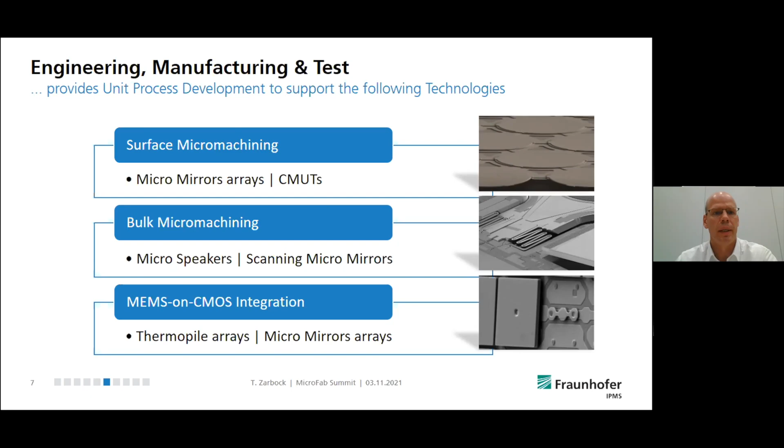And two examples, let's say from the customer side, or at least in this case, it's more on the development side. One example I can show here is what we consider one of the next big things in micro-optoelectromechanical systems. So it's supposed to be a phase modulating micromirror array for real holographic displays. This is currently an EU Horizon 2020 project that has been started last year, beginning of this year, and is supposed to be running until end of '24.

It's comprising also a consortium of different partners, 8 partners from 6 countries in the EU, and it's currently starting at TRL 3. It's supposed to go the way to TRL 5, and the status is that design phase has started, as you can see at the bottom, and the initial chip manufacturing has started in my clean room, and the application that it's supposed to be targeting in that project is a pilot and a showcase for a head-up display in automotive, so in the windshield of a car.

The good thing is it's what we call real holography, which is eye fatigue proof and real genuine image quality in real time. So not what we are used to from television at home, but it's the next level. Another project that is already at TRL 7, it's also with automotive. In this case, it's a solid state LiDAR system for autonomous driving. The customer that we have here, and we can also mention, is the company AEye from the United States.

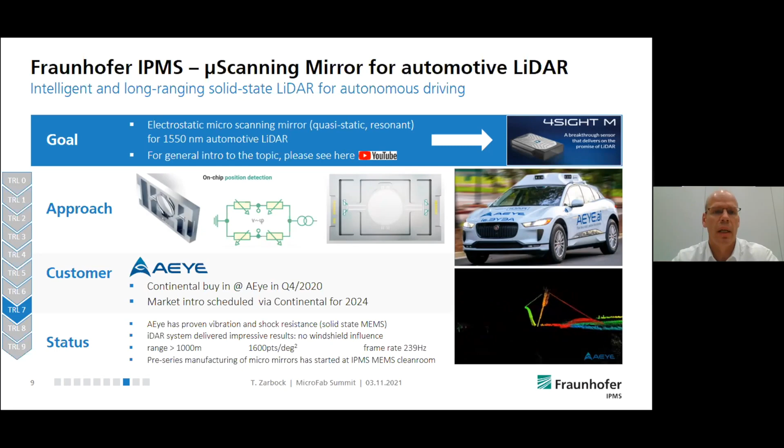Continental has been buying into that startup company Q4 last year, and the market introduction of this system in our device is supposed to be in 2024. As you can see at the bottom, there are quite some impressive features that have been achieved already. So the range of the system is going up to 1,000 meters. It has a high frame rate, and pre-series manufacturing of the micromirrors has started in my clean room as well. And as I said, this is already at some high TRL level and supposed to be going productive in 2.5 years from now. That is some overview from my side.

And here I would hand over to Mr. Schieferdecker, the CEO of Heimann Sensor in Dresden, one of our long-term and most important customers that we have from the industry side. And he is giving some insight into the thermopile application. Great, thank you very much, Thomas, and Mr. Schieferdecker, again, welcome. And if you could launch your slides now.

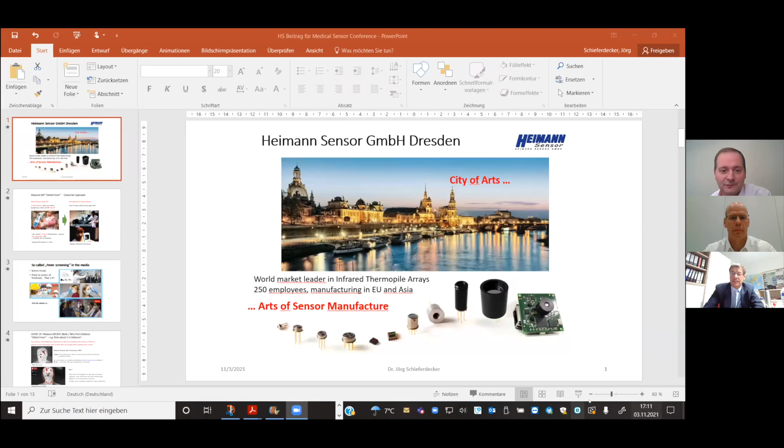Okay, I just tried to release them, so I hope it is released. Yeah, I think they're coming up. Here we go. Beautiful. That's great. Okay. Excellent. And then, yeah, so to stay on time, let's aim for 6 or 7 minutes, and we have a couple of minutes for Q&A. Okay, I try my very best.

My name is Jörg Schieferdecker. I am the CEO of Heimann Sensor. This is a mid-size company with the headquarters in Dresden, Germany. We are a world market leader in infrared thermopile arrays, have over 250 employees and manufacturing sites in Europe and Asia. And we have a bunch of different sensor products for single detector and array detectors for infrared imaging.

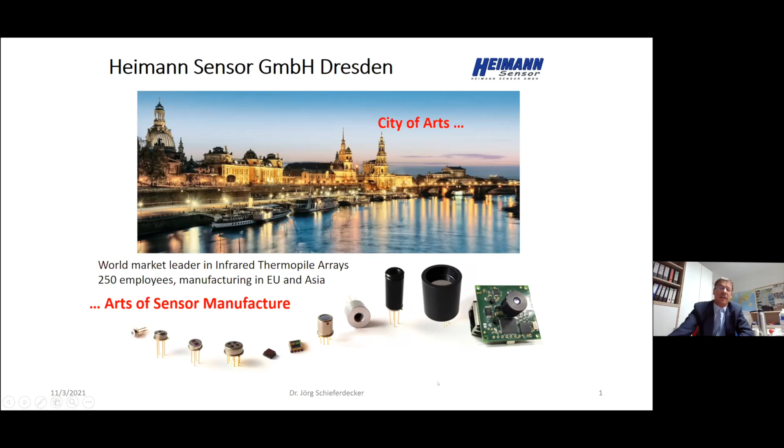Now I want to concentrate on the medical application rather than the technology. One of the main applications, especially in the last year and this year, was to measure the elevated body temperature to detect fever as a consumer application.

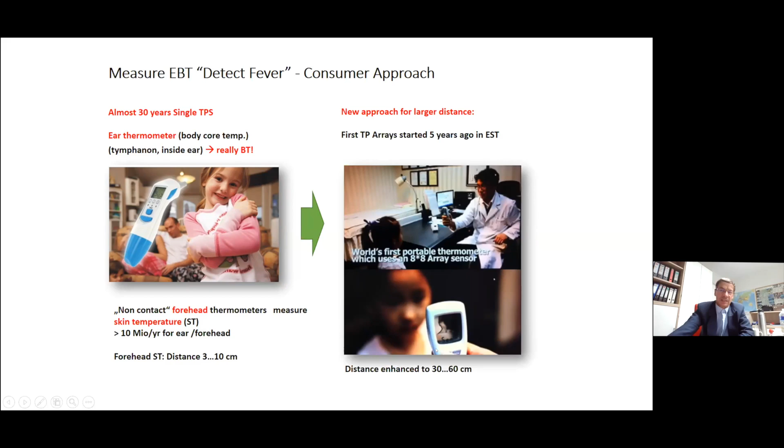We have been almost 30 years dealing with single infrared thermopiles. Everybody knows the ear thermometer or the forehead thermometer to measure body core temperature, and that is running in several 10 millions per year in a nearer distance to the forehead. And about 5 years ago, we started the first 8x8 arrays to measure from a larger distance, like 30 to 60 centimeter. But still, that was not enough for the needs to measure body temperature accurately from a distance.

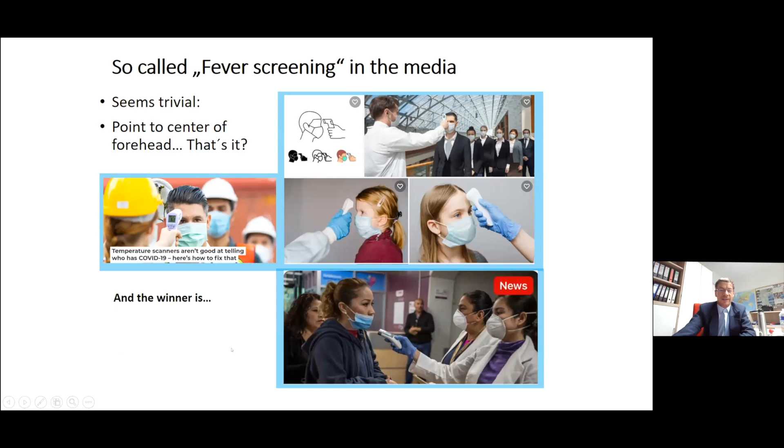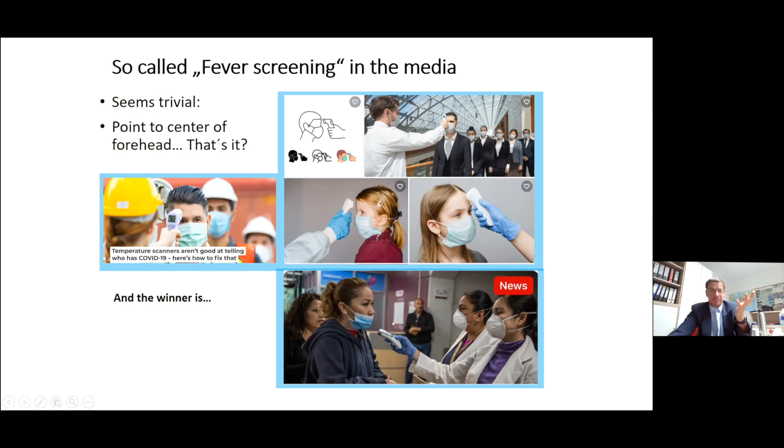Here, what we see is some funny stories about the so-called fever screening in the media. It seems to be trivial. Some operator is pointing to the forehead of a person, right in the middle, and then he measures the body temperature accurately. Unfortunately, that is not the case, since there's not necessarily the higher temperature. The winner is, you see this in the news, even a photo where the people even measure the mask. Of course, this is absolutely ridiculous and far from correct, because the mask has a much different temperature than the body. Anyway, we want to check how can we do it more accurately.

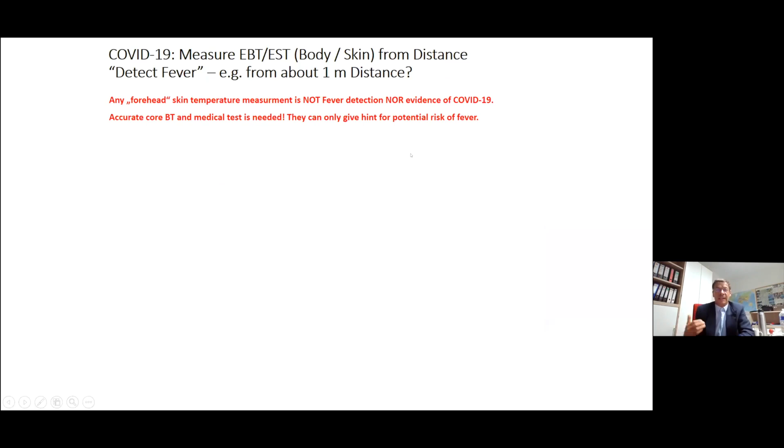Of course, infrared array imaging forehead skin temperature measurement is not accurately a fever detection nor the evidence of COVID-19. For that it is necessary to have accurate body temperature measurement, and a medical test is needed. However, they can give a hint for the potential risk of fever. Why is that the case?

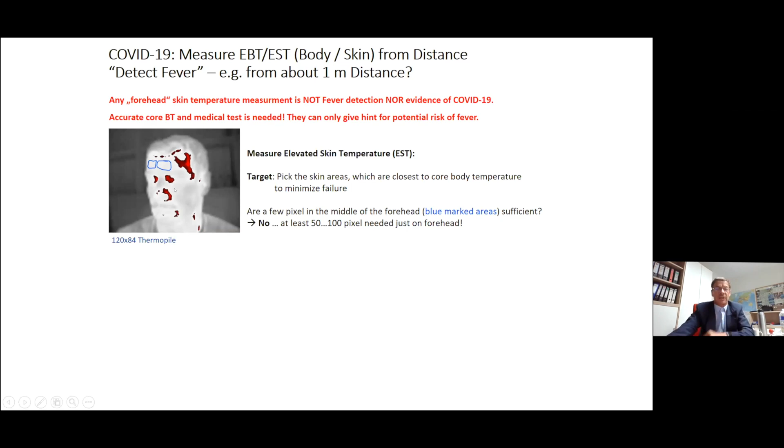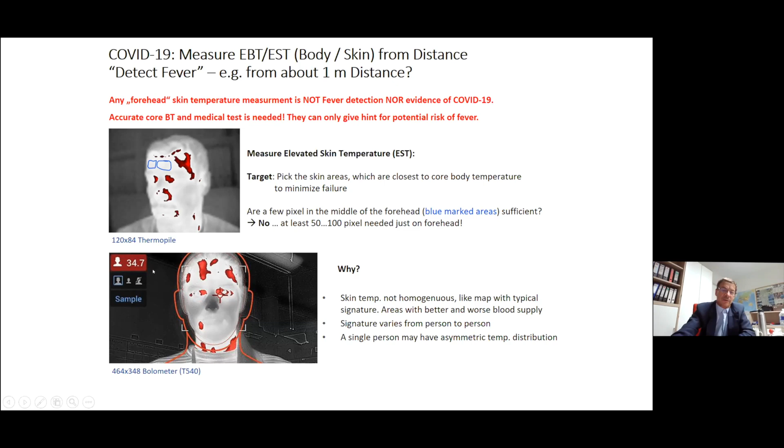One slide you see here is taken with one of Heimann Thermopile Arrays to see the temperature distribution on the skin, on the body. And you see just in the middle of the forehead where these blue circles are seen, that is not the highest temperature. You see more on the side, or especially in the so-called tear ducts of the inner eyes, you have much higher temperature, which is much closer to the body temperature. And you have a kind of special signature. Every person may have a different temperature signature. So if you don't have enough pixels on your forehead and on the face, you can't measure accurately.

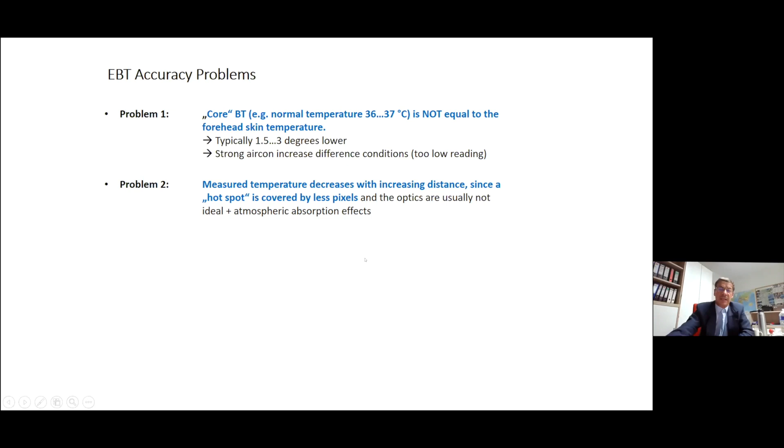Some elevated body temperature accuracy problems. Problem number one, the core body temperature, that is typically 36 to 37 if you're not sick, is not equal to the forehead skin temperature. That is typically 1.5 to 3 degrees lower. And a strong aircon makes even bigger differences. Problem two, the measured temperature decreases with increasing distance between the thermometer and the body. If the body goes further away, the hotspot is smaller, covered by less pixels, and there are atmospheric absorption effects. So all this has to be taken into account.

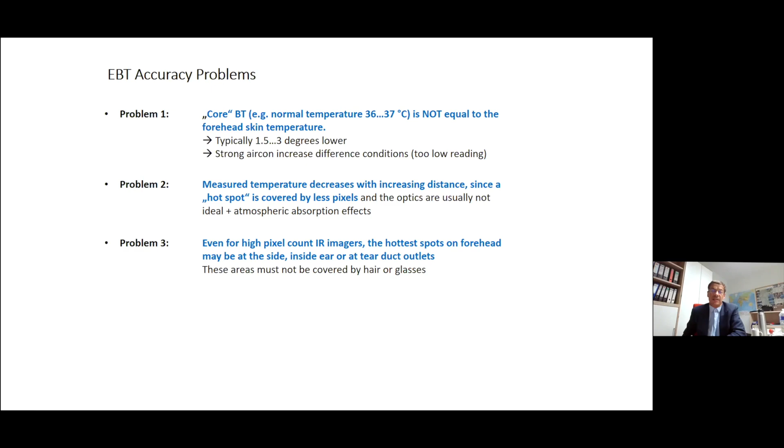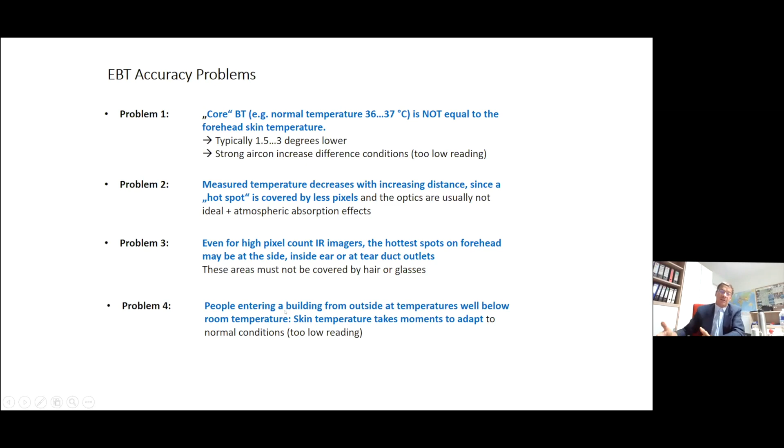Problem three is, even for high pixel count infrared arrays and imagers, the hottest spots on the forehead may be at the side, inside the ear or tear duct, and these areas must not be covered by hair or glasses. And finally, people entering the building from outside at temperatures well below or above the room temperature, then the skin temperature has to adapt, and that takes a while. Also, that leads to wrong measurement.

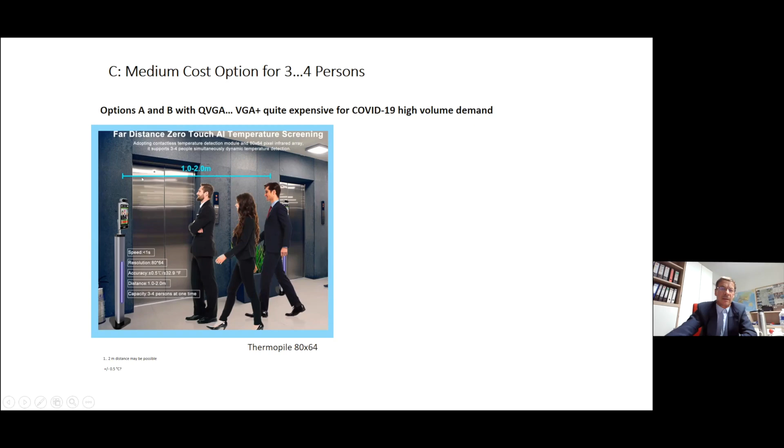Anyway. Jörg, we can hear you. We can hear you fine. It sounds like maybe the echo is on your side, but we can see everything. Okay. We can hear you fine.

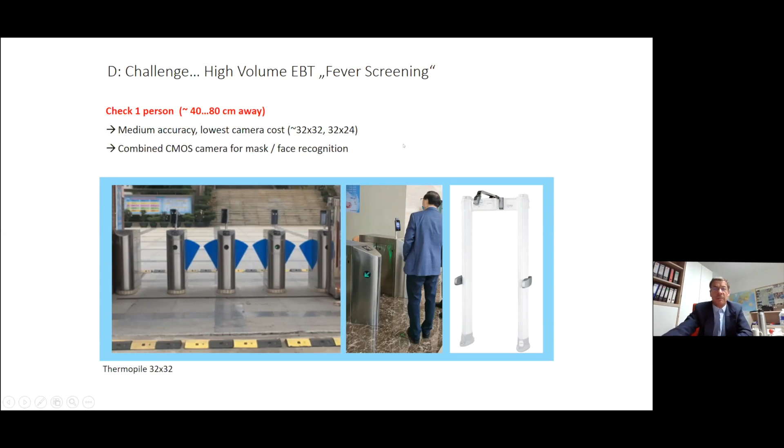And finally, the big challenge, especially in the last year, was the fever screening of many, many people at the entrance of train stations, schools, hospitals, and so on, especially in Asia. And you see here at all these entrances, you have one of the cameras that needs a very big amount. And also Heimann was making in the last year some 1 million plus of such infrared low-cost imagers, typically with 32 by 32 pixels only, to measure that.

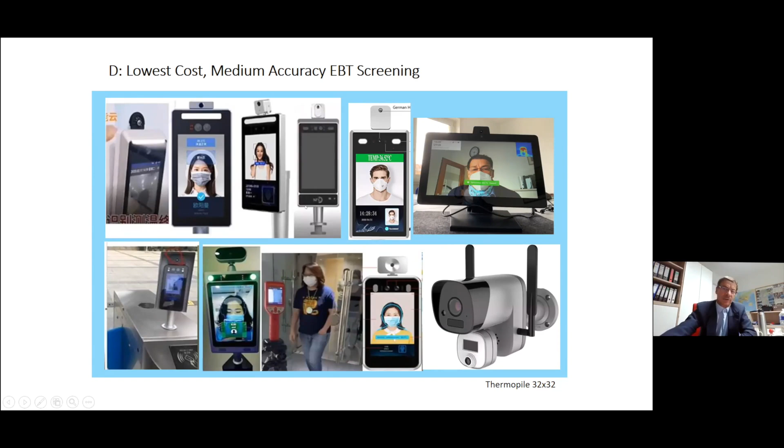And here as an example, many of these different types of pen type displays combined with an infrared array from Heimann, and next to it is usually a CMOS camera, because the device is also showing you whether you have a mask on or off, and tells you you're in good temperature or you have elevated temperature and you're not allowed to proceed. So these are some of the examples.

And to come to the end, to be in time, some words on the cooperation between Heimann Sensor and Fraunhofer IPMS. Heimann and IPMS have been in intensive cooperation for the last 20 years. The success factors for the joint development are the direct neighborhood of both partners in the Dresden so-called Silicon Saxony, the Silicon Valley of Europe. At no other European location are more silicon wafers processed than in the Dresden area. And here we are together with a foundry. All this is within a few hundred meters. This is one of the key factors.

Furthermore, IPMS has intensive MEMS and silicon technology know-how and makes this available to us. And we combine it with comprehensive experience in R&D and the manufacture and technology of infrared sensors and their application. That allows us to have a very fast development cycle to turn new product ideas coming from Heimann, with some IPMS know-how, into a pilot run. Pilot runs are often at IPMS or partly at Heimann, and continue with mass production at Heimann later on if the volumes are big.

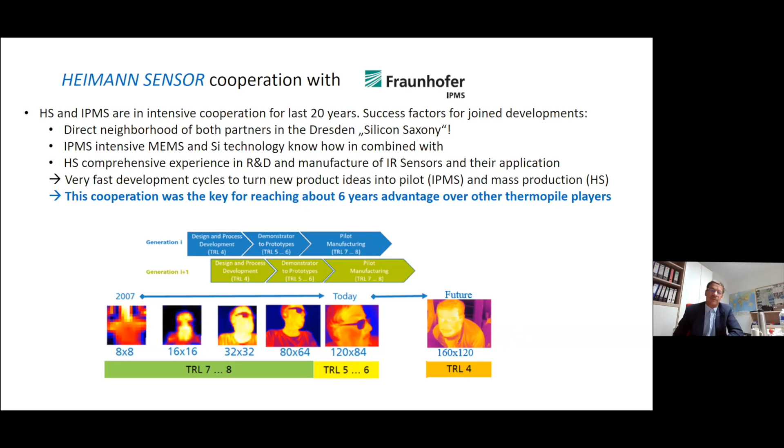80x64 is where we opened the door to infrared imaging. Our highest in production is now 120x84. And we are working on 160x120. That is an image of it, but this is not yet in production, just in development for now. So this is the roadmap, what we are doing and what's going on. And so this was my part. Not sure if Thomas will say some additional words. Anyway, from our side, this cooperation between Heimann and Fraunhofer was really a success story for both.

Okay, all right. Well, great. Thomas, Jörg, thank you very much for the talks. It's very good to hear about how Heimann Sensors has been working with Fraunhofer, and it's a great example. Appreciate you sharing the case study. Thomas, also thank you for highlighting the capabilities of Fraunhofer and some of your very exciting companies like AI. It's great to know that you're working with AI on LiDAR applications.